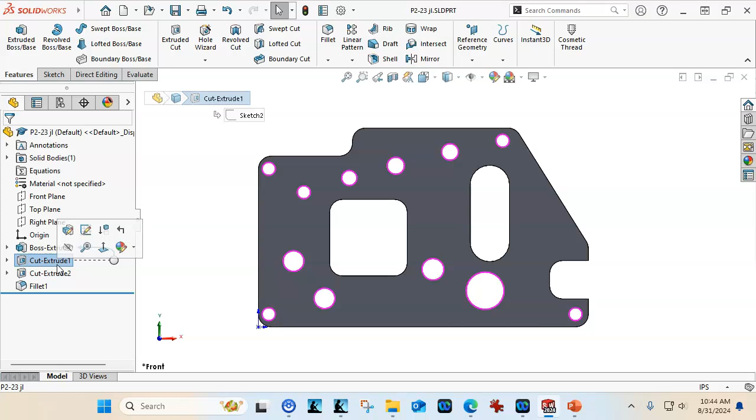Okay, so continuing on with P2-23, the hole wizard has some good advantages over just drawing these as circles. One of the things we can do with our what-if scenario is look at the cut, and because I separated these out, I can go ahead and suppress.

The other item of interest you might want to do is the rollback. So if you ever accidentally on purpose grab the blue bar, you'll see the little fingers gripping it. The rollback bar treats it as if the fillet and the history tree, whatever we create, whatever we put in is going to go in between cut extrude 2 and fillet 1, and then when we roll forward, it will complete fillet 1. If there's any geometry that gets removed or changed, it'll bark at you, but it's not really that big of a deal.

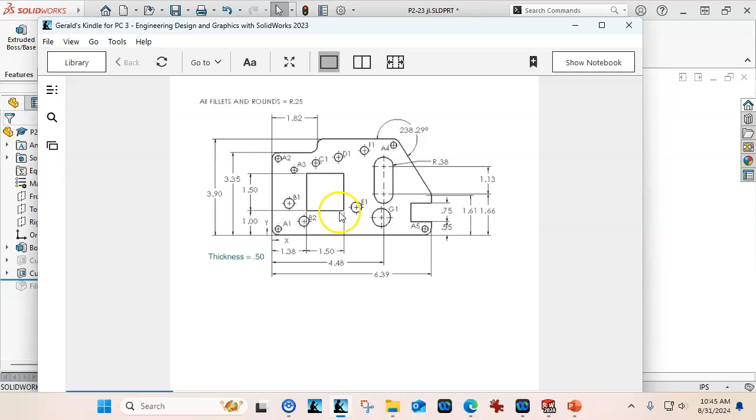So let's take a look at our drawing again. Instead of just drawing all of the circles, we really are going to break these down into the quarter inch and then go back for each of the hole sizes. Each of those is going to become a separate feature based on its hole size.

Right, so we're in inches. We're going to do the rounding pretty close. And with the hole wizard, I'm going to recommend that you pre-select, so picking that face first and then going into the hole wizard — it's not going to ask you those silly questions after. So we want a quarter inch through hole.

And we are in metric, so we need to scroll up to inch. I would like to see the fractional drill sizes just to kind of clear that out. And if we show the decimal values, that will help with determining our rounding. So we're going to look for a quarter inch, scroll down.

Again, for just regular edge breaks, I'm not going to do the near side, far side countersink. I'll just put an edge break note on the drawing.

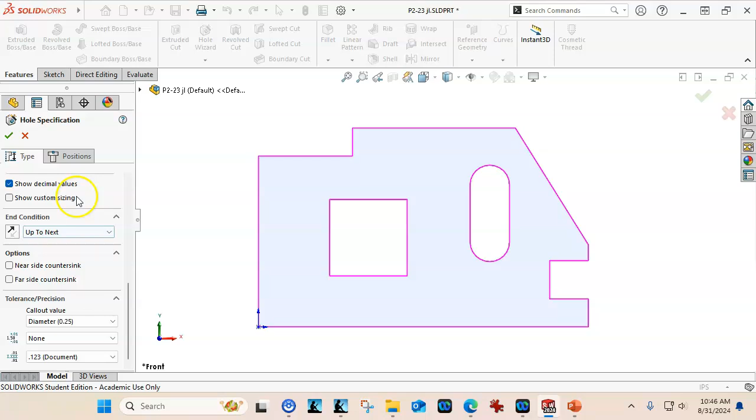And this is going to put us into points. It automatically goes to points and says start sketching. Make sure I don't miss one again.

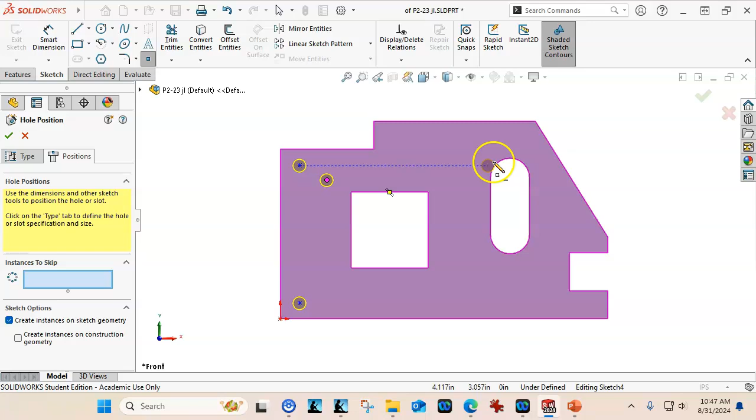So A3, A4, and A5. This is also going to simplify it a little bit with the ordinate or the dimensions.

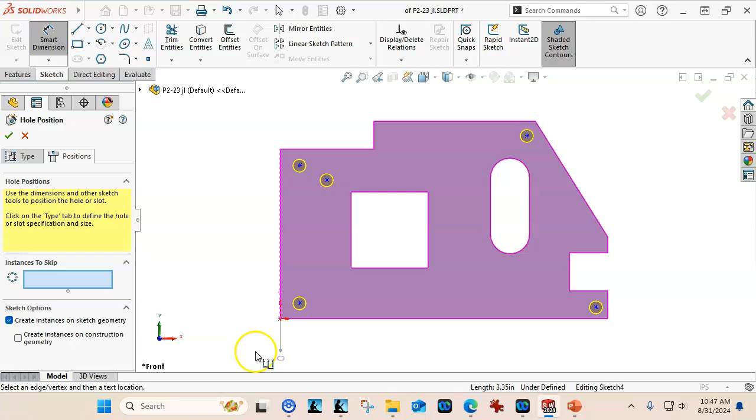So if we want to stay with the ordinates, then it would go back to more dimensions, find the horizontal, place the 0, the x ordinate, and then we'll go through and pick up those items.

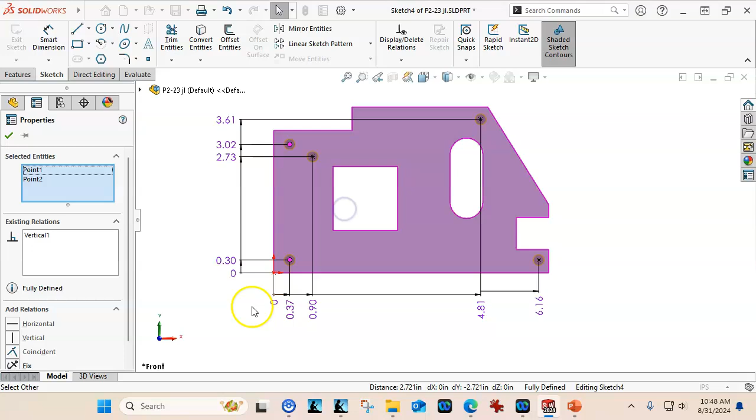Right, and then I can go more dimensions, pick up the vertical ordinate, set the 0, go place those dimensions, and we'll just get back to select — hold down select the first point, hold down the control button, select the second point, we'll make that vertical, and then if I just go to the next point that isn't selected, click on it to select it, hold down the control button and select it, I can get into kind of a rhythm and flow of setting those relations.

All right, so for our dimensions, we have 0.25, 0.25. For A3, we have the height of 2.64. And for A2, the height is 3.1. And then for F, or A4 — F jumped out there — 3.65. Let's see, are we missing any there?

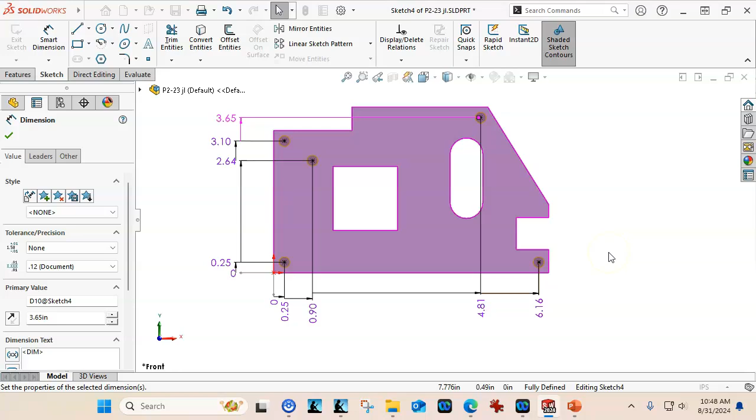Okay, everything's fully defined. We go ahead and accept, and we have our first group. Reselect, hole wizard. We're going to look for the B's, which are 400.

So if we're familiar with the series, we do have an X drill that is 397, but that assumes that you have looked at a drill index with the number, the fractional, and the letter drills. And so I jumped over to the fractional drill sizes.

But if we just said — 5 or 10 thousandths, 6 thousandths over is a little bit much, I would rather be closer than that. Then I can do all drill sizes, and we'll go find something that is a little bit closer. So in the X drill, we're 397, which is 3 thousandths under, and the Y drill is 4 thousandths over.

The other consideration would be since this is 2 decimal places, most of the time that's going to be plus or minus 10 thousandths on the tolerance of the size. Sometimes 15 thousandths, but the closer we can stay to the actual number, the better.

All right, so we have our B1 and B2. On these, I think I'll just go ahead with — oh, I hit the right mouse button, which ends it. So just like the rest of our features, we're going to click on it and edit the feature.

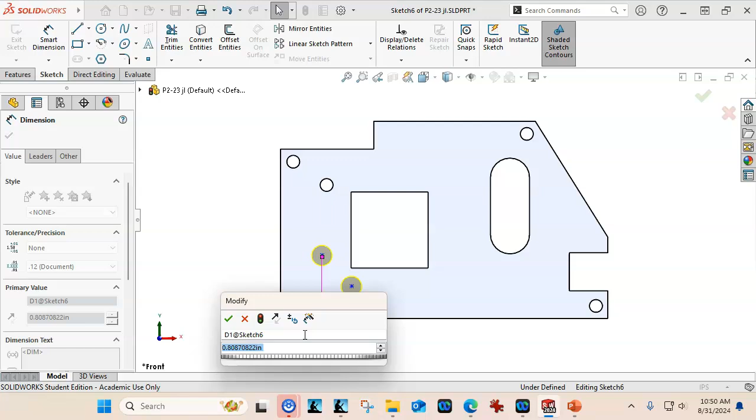We'll go back into the positions. And so if we want to just do the regular — I don't know that the ordinate's going to have any real advantage for just a couple of dimensions. So 0.68 and 1.29.

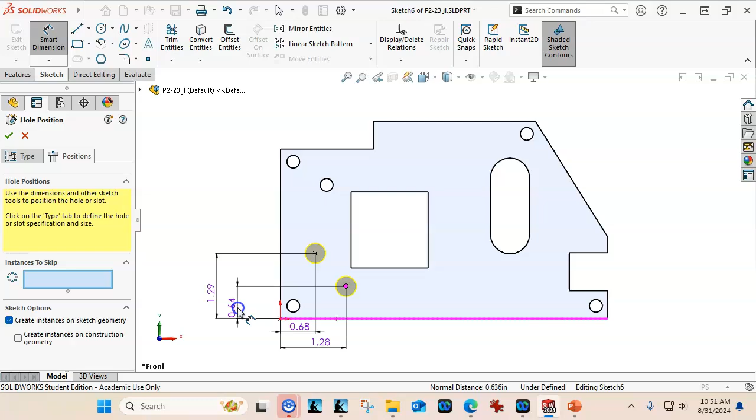And then B2 was 1.28 and 0.64. So we have those two, we can go ahead and accept, and then back into the Hole Wizard. Even though these are singles and we could draw them as circles easy enough, I think the example of being able to change these is still going to make it worthwhile to go through this process.

So 0.29, we have an L drill that is 0.29, so we'll go with it. Put the C in place, go into the dimensions. And that time I did not see the little mouse icon with the checkbox when I hit the right mouse button to get into select for the dimensions, so it didn't kick me out.

And 2.92, 1.76, and 2.92, and we'll accept that one. For the D then, all right, so I didn't pre-select this time. We're looking for our D value as the 0.33. So we're going to find something pretty close, 2 thousandths over, 2 thousandths under. Probably would go just slightly undersize, just working on the material that we can always take a little bit more. It's hard to add it back in.

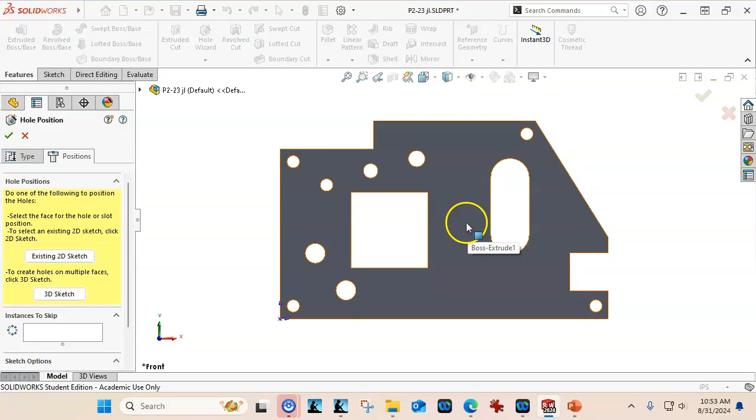E is 0.42. So the 27/64 looks pretty good. Place it. And there is the mouse button with the checkbox. So if I move away from the solid area, then it looks like it will remove the check mark that would accept the sketch.

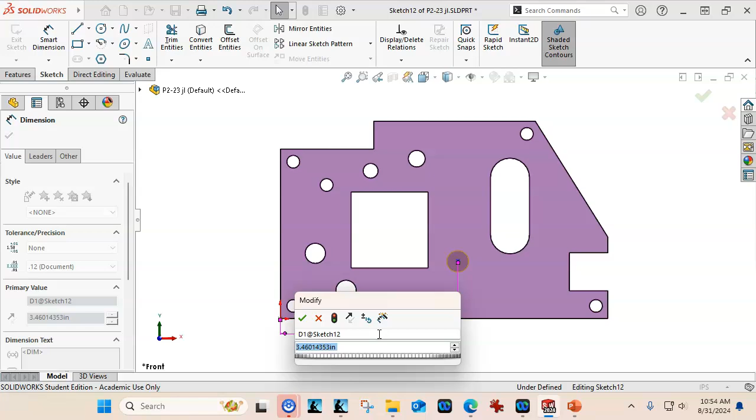All right, so F is 3.38, and the vertical 1.13, and we'll go ahead and accept it.

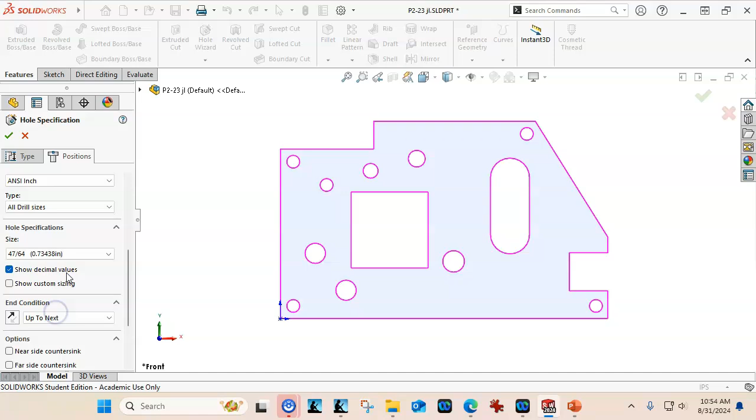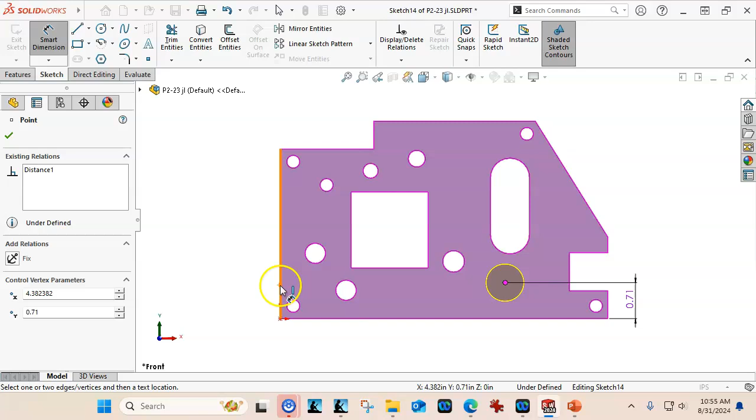All right, pre-selecting, let's go to G. And G is 0.73, so probably the 734. And we need to go to its position and notice the green check mark, and when I move away then I can get back to the select or the smart dimension. So its location is 0.71, and 4.39.

Okay, so that should be all of the holes. Do a count again, make sure I didn't miss anything. And let's edit the sketch. So expanding out, we have a couple choices. If I go to the feature, the second on the top row will be edit sketch. If I expand out and go left click on the sketch, then the first item would be edit sketch. Either one of those will put us into the sketch.

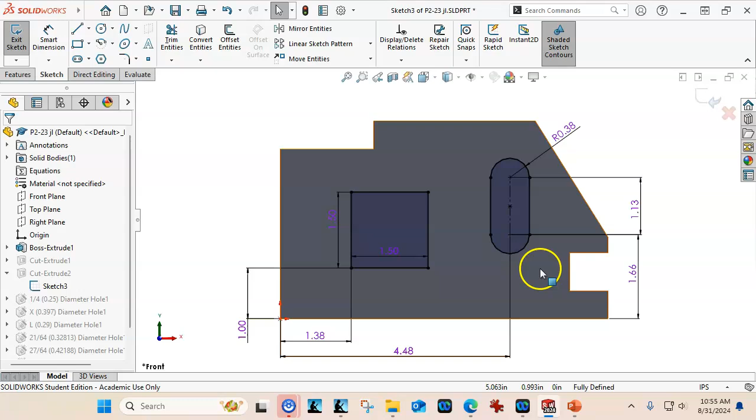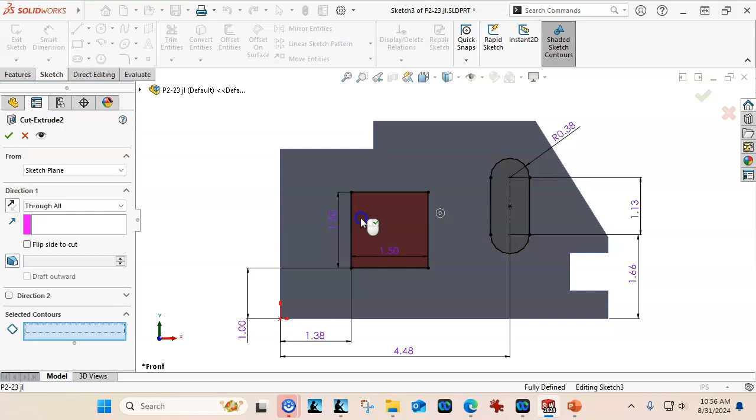And since we did the slot there, I could change this over to construction geometry if I didn't want it to exist anywhere. If I wanted to use it somewhere else, then option 2 is to edit the feature, go into the contours, and say I just want that one contour. And that does the hide, or suppresses - well, it doesn't build the slot into that group. So the reason I did that then is to show the Hole Wizard slot geometry.

And the slot is 0.38, so we could say 0.75 - make sure I'm just on the straight slot. And we'll go to 3/4. And the slot length is 1.13, and it gives us the options to go center to center or overall length. So right now we're at center to center.

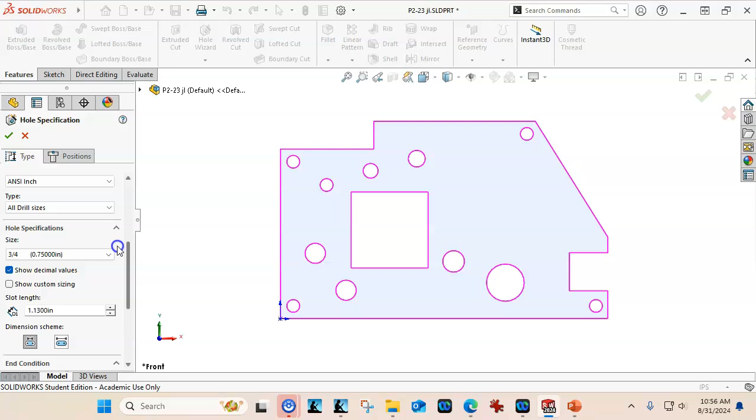And then that looks like everything it needs to go to the positions. We can place it, and then we'll go into the select, and we can rotate that up, make sure that it gets vertical. We'll get the dimension out of the way a little bit. And then we're doing the same 4.48, and missed. So we'll cancel out of that and try again.

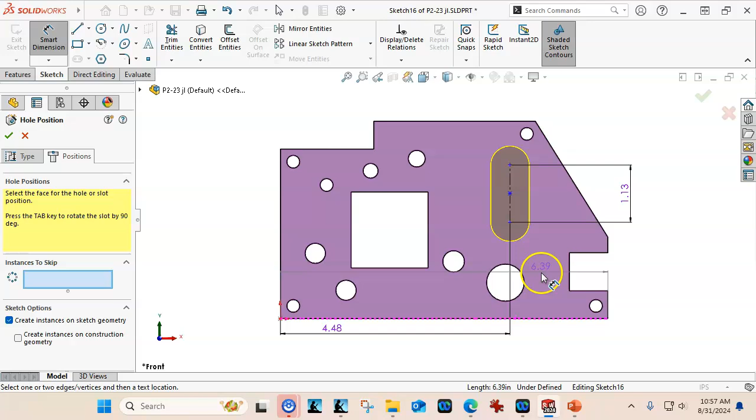4.48, and then to the center is the 1.66. And got a 90-degree in there, so let's hit escape. Make sure that we're getting to the endpoint, 1.66, because the yellow is telling me that it hasn't generated that slot. There's no objects there. It is where it's going to be, but right now for the Hole Wizard, we have the endpoints of the center line and the midpoint to work with. So we go ahead and accept that.

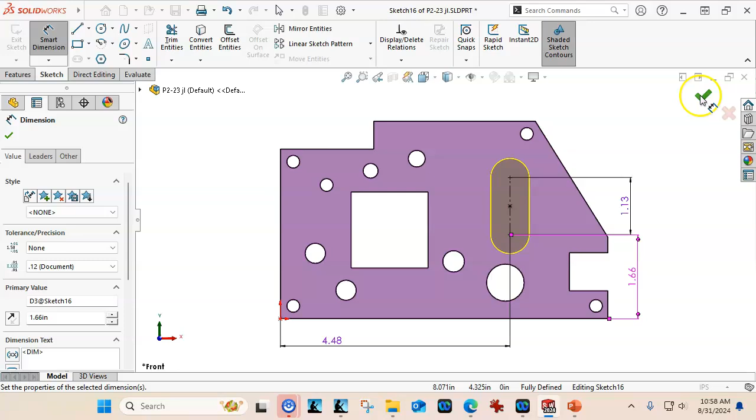And then we'll roll forward to the fillets, make sure everything is good there, and then we can save it. So where this comes in, if I wanted to check, is I can go back and highlight and see where I missed the other one. A4's on the top group is still giving me some fits, and it looks like I missed one more. So if we did not roll back, let's go into the Hole Wizard one more time.

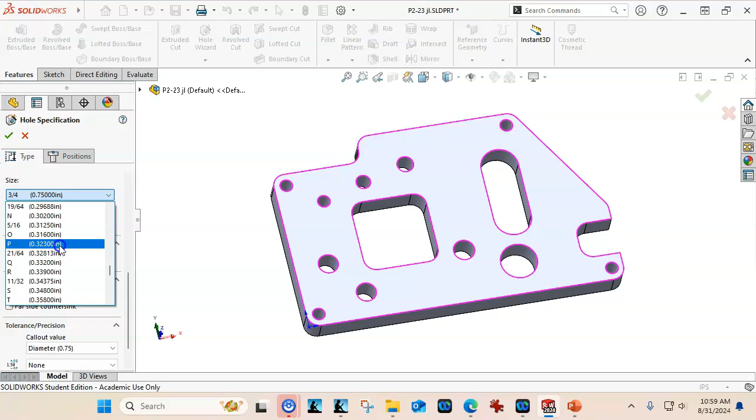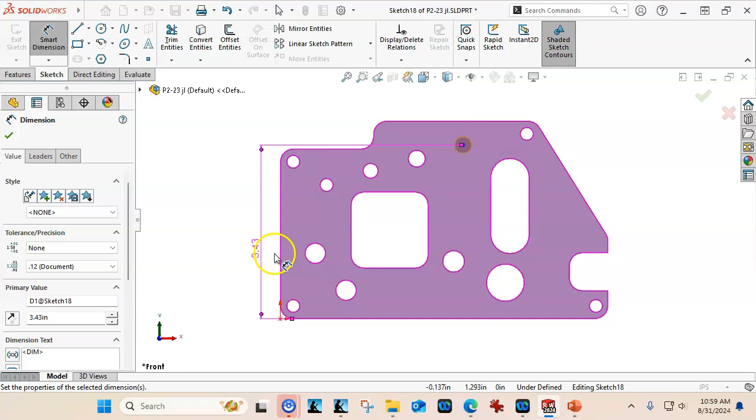Figure out F1 was a 0.32. So 323, 316, yeah, probably the 323. We'll go into the position, place it, get away from the solid so that I can right click and get into the dimension. F1 then is 3.43 and 3.71.

So in this case, if I wanted to maintain the order, I would just left click and drag and pull it before the fillet. So we highlight again. That leaves, what did I do with the first? And A4 is 4.88, so missed it by that much.

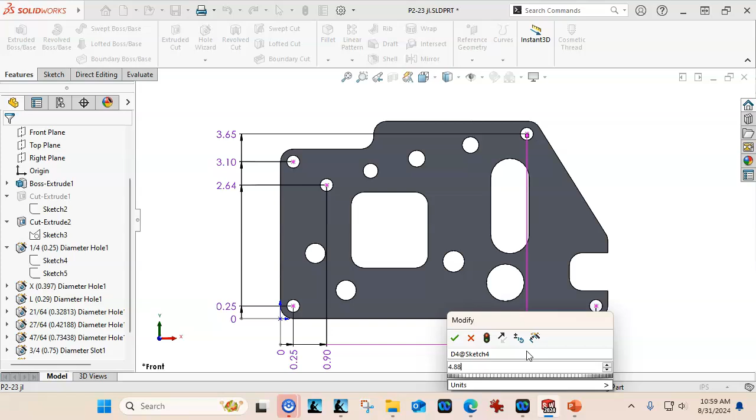So that was kind of the problem of it being too close. And we just want to make sure to rebuild it, save it one more time. And then if I'm looking, even though it's suppressed, I can edit it. All right, well, there's another one.

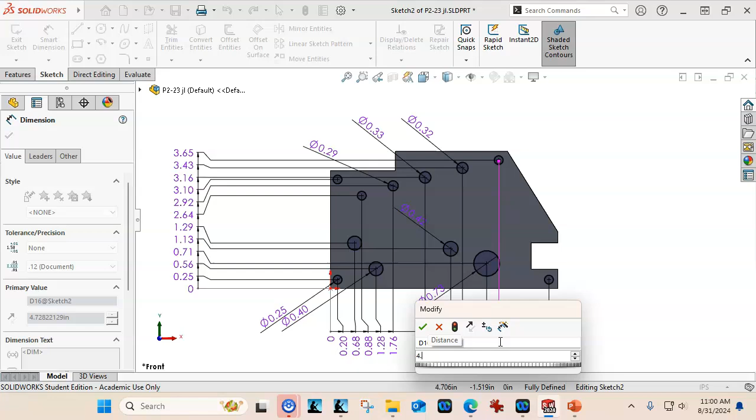So with multiple iterations, making enough passes on it, eventually we get them all, but we would want to double check these anyway. There's a lot of information there, and you've seen how easy it is to miss or overlook something. So the Hole Wizard is going to be functional then, because we'll take one of these.

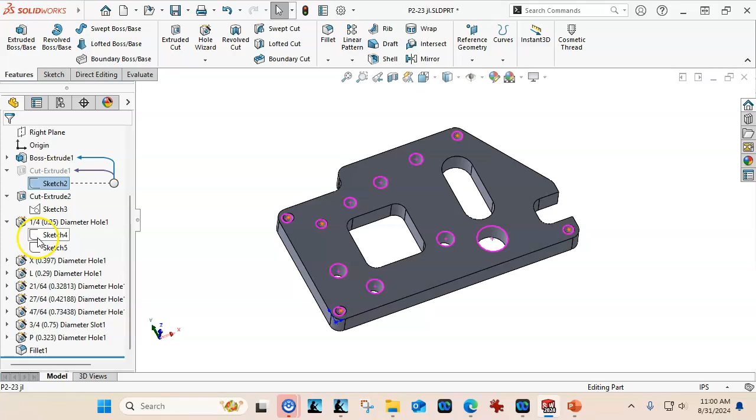Let's go with the X, and I will edit the feature. And since 397 is pretty close to the 10 millimeter mark, maybe we would have a clearance hole for a socket head cap screw, and we would go with a 3/8.

Okay, and then the positions stay the same, but just like that, I can switch those over to a counterbore. The .29 might be a little larger loose fit for a countersink, but if we were to switch that over, it defaults to the 100 degree, but we, for an inch screw, want an 82 degree, and we'll pick up the 1/4 inch.

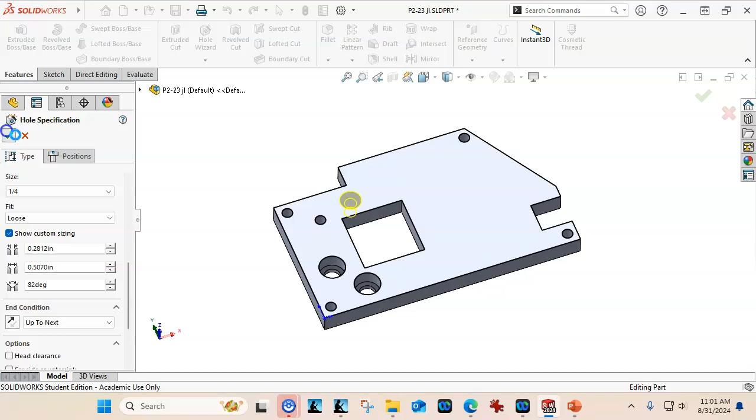And if we wanted to check the sizing, we are 266. And if I go up to a loose fit, it goes up to 281, so pretty close. We could adjust that if needed, but it really depends on what we're telling it to do.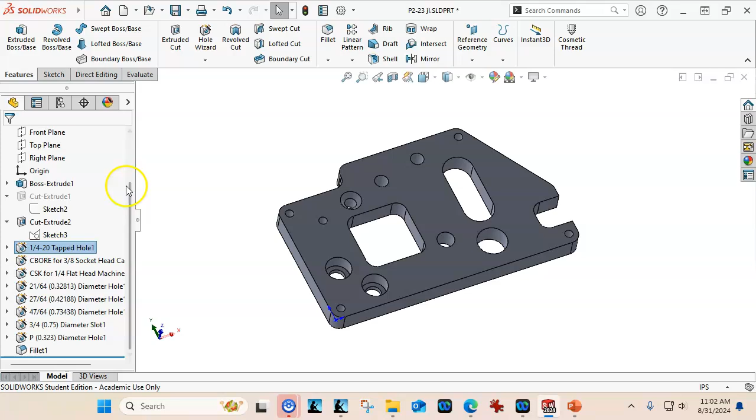All right, and then the other ones, let's see, probably the 1/4 inch would be the best one to do the thread. So if I switch over to a threaded hole, it goes to the 1/4 20, and then we can accept. And looking at it straight on, it's not showing me my cosmetic threads, so let's go.

And because I just changed that, I do want to check. So right now, the options show the tap drill diameter. If I want to see the cosmetic threads, or I'm expecting to see the cosmetic threads in there, then I'm going to edit, and I'm going to go back and we'll see if the tooltip catches up to the cosmetic thread. The one that I haven't ever really seen is to remove the thread and have it go to oversize. I'm not sure exactly what the point of that one is, but it's always been there.

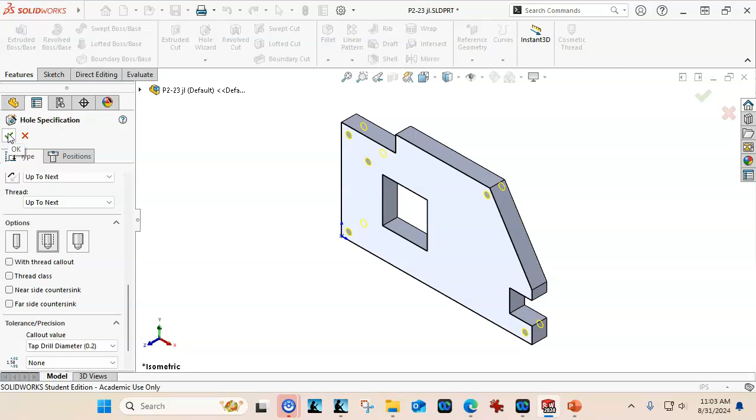On this then, now we can see the cosmetic thread, and we go into that geometry. So one more save, and then we'll compare these and generate a drawing as an optional step.